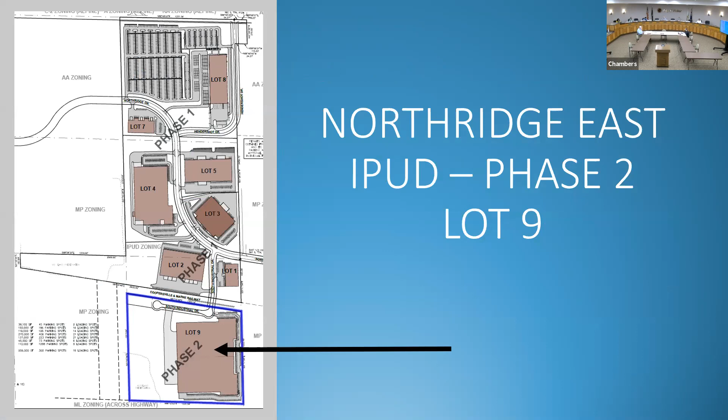So again, here's the amended version of Northridge East IPUD Phase 2. And we're calling this Lot 9.

So for the Speedrack site, the following improvements are proposed, and this is just for Phase 1 of this development. Phase 1 consists of a 278,000 square foot building for shipping, warehouse, and manufacturing. It also has some space for office and some training. There are 194 parking spaces proposed, and the plan also calls for 111 deferred parking spaces. And then there's an additional 349, I believe, parking spaces that are called out on the plan to be deferred, and we'll talk about that a little bit more in a few minutes.

They are also proposing lighting, landscaping, and stormwater management facilities. They're bringing utilities all the way to the western property line, water and sewer. And there's also space for future building expansion that would mirror Phase 1.

So Phase 2 would consist of essentially this, the other half of the building. So in the end, this will be a pretty large building. So here's the overall site layout.

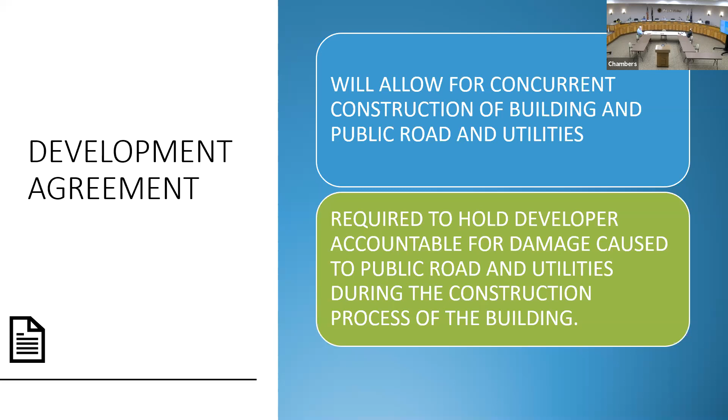So to speak to the railroad crossing, it's an easement agreement, separate from the development agreement, and it's being reviewed and handled by the manager's office, the developer, and the city attorney. There were a lot of emails going back and forth about items to include in the easement for the railroad crossing, including that sight distance be maintained so the railroad tracks on both sides are visible at all times.

In addition to the easement agreement, we've asked the developer to add a note to the plan indicating that no trees or other landscaping are allowed that could impair the lines of sight to the tracks. It says to mow the area regularly, and vegetation shall not be allowed to exceed 12 inches in height. It's always good when we have that right on the plan, so we don't have to go digging for a separate document if we ever have to enforce it.

So I am making a recommendation that the Planning Commission grant final area site plan approval for the 278,000 square foot industrial building and associated site improvements for phase 1 for Speedrack Midwest within phase 2, or lot 9, of the Northridge East IPUD, per the plan set with the last revision date of April 19, 2021, subject to the following conditions.

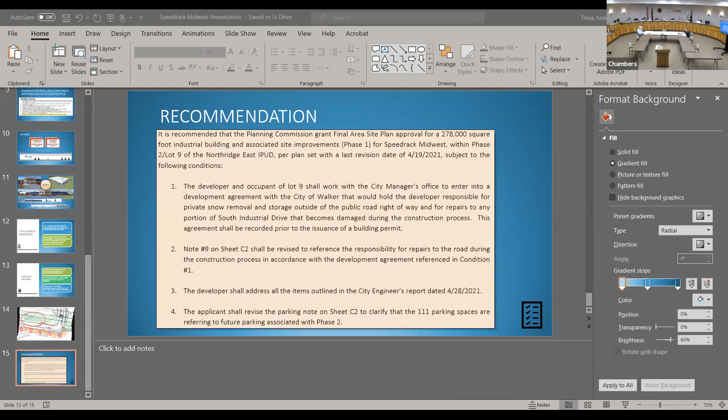How often does a train go down that track? That's a good question that I do not know the answer to, but I have been on the Coopersville Marne Railway on the Santa train. Is that at a holiday or something? Or the robbery and stuff on it? Would Commissioner Bile have an answer to that?

I didn't hear the question. Oh, is your mic on, Joe? How often does a train go down that track? 6 times a month, maybe? 6 to 8 times a month, not high traffic at all. That much? Okay.

I do have a question though. Item number 1 says the developer is responsible for private snow storage outside the right of way. Is that what you're intending to say? Keeping snow storage out of the right of way. Is it not reading right? I don't know, I was trying to figure out what it was saying. So, to hold the developer responsible for private snow removal and storage outside of the public road right of way.

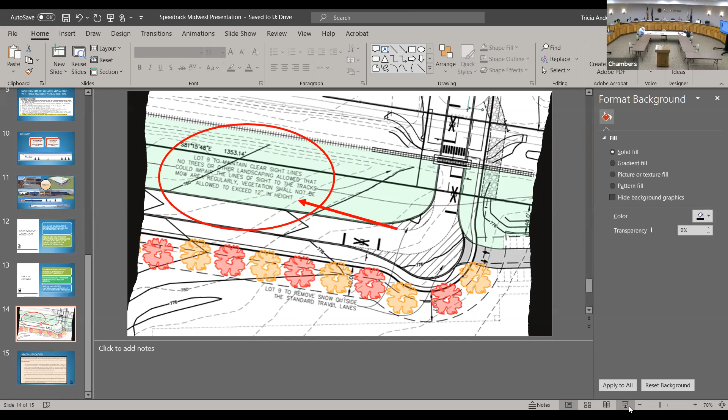So Scott's memo was dated April 28th, 2021. You'll notice it has 8 bullet points on it, which is typically more than we usually see at this point in the process. But Scott wanted to make sure I pointed out that the reason there are so many comments at this point in the process is because when this went through site plan review, the plans were missing a lot of information. Our main comment was to get a lot of stuff on these plans.

So what you're seeing before you now is almost more of what we would typically go through at a site plan review. None of them are showstoppers. They're important details though that we still want to have addressed. I can talk through each one of them, or I'll just try to go through them real quickly one by one.

So the main sheets we were referencing are C2 and C3. C2 is a site and utility plan. We had a comment to add driveway details such as driveway width, the radii for the driveway coming off the end of the cul-de-sac there, and towards the end of the road too.

The second bullet talks about truck sizes. You're going to see some dashed lines on South Industrial Drive that make that bend through what we kind of call the wounded knee, because it looks like a 90-degree curve there. We'd like to know what size truck turning templates were used to make those lines, because we want to compare that to what size trucks the company needs to use on a regular basis. It's in everyone's best interest to keep that turning radius as large as possible to allow trucks to pass by.

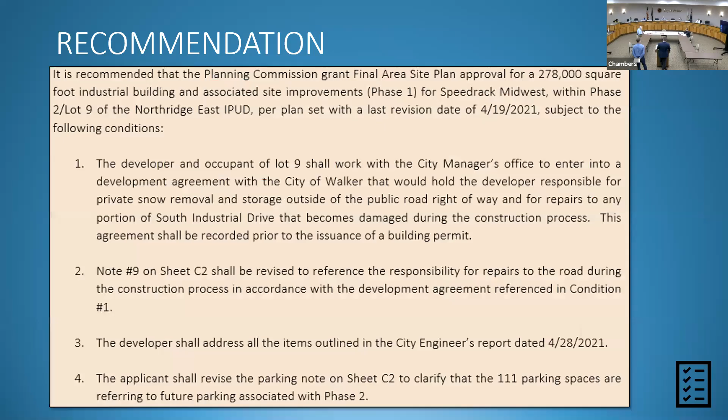Obviously right to work, so this won't automatically be a union facility, but we have a very good working relationship with the millwrights out of Warren, though they have a facility on 131 in Wayland. It's a brand new facility, a wonderful training facility. They're going to help us recruit employees for this facility and train them as welders and robot operators and so forth. That's another wonderful opportunity.

We plan to have them on board with full benefits, medical benefits, vacation, sick time.

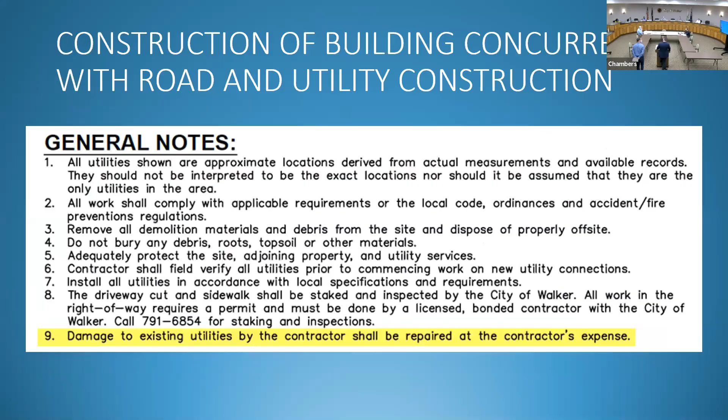Sounds like a nice addition to this area. Yeah, I think the average wage should be right around $25 an hour. I think this area for what we do is probably going to demand that, but I think we'll be competitive with that wage in this area.

One of the things raised in the review was the number of parking spaces. It sounds like even with the number you've deferred, you may have more than enough parking to meet your needs. Certainly. Originally we're planning upwards of 150 hires in phase 1, including the 20 salary folks, plus the 40 coming from Sparta. It'll be a 2-shift operation, and the next phase will probably be 75 to 100 more employees, so I think we'll have plenty of parking.

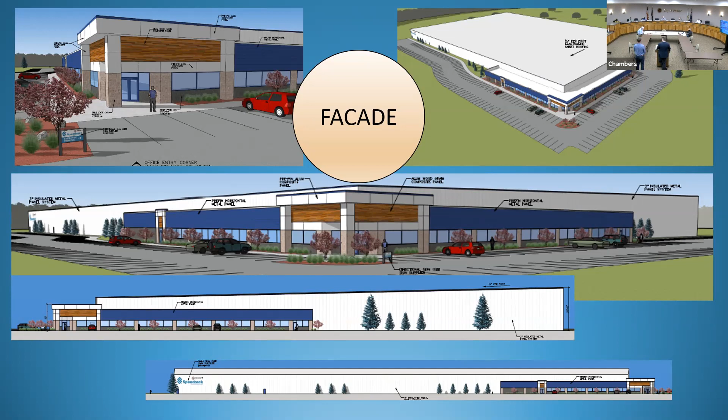It sounds like with 2 shifts, when there's that crossover, you've got the capacity. Yeah, and that road coming around, there was some question on that 10-foot area. If you look at that, our salary employees are over on the east end of the offices. We originally had employees coming in that same entrance and parking over there, but it's really a safety concern, because typical hourly employees want to get out of work and get going. So we decided to divert that traffic that way for the hourly folks so they don't have any problems getting out.

All right, very good. Commissioners, any other questions?

So I sense from your standpoint, times are good and they're going to get better. You're building stuff for new plants, new machinery, new shelving, and you're expanding, so you're doing well during good times, is that right? Yeah. In our industry, because of Amazon and what they've shown us, they've given us a picture for the future for the next several years. For us to meet that demand, this building is necessary for us to continue to grow. But just e-commerce in general, Gap, we do all of Gap's buildings across the country, and they're becoming almost 100% online. The clothing retailer e-commerce, and Macy's is going that direction as well. With everything with COVID, I think people are used to ordering online and they're going to continue to, and that's our specialty, building these types of racking systems.

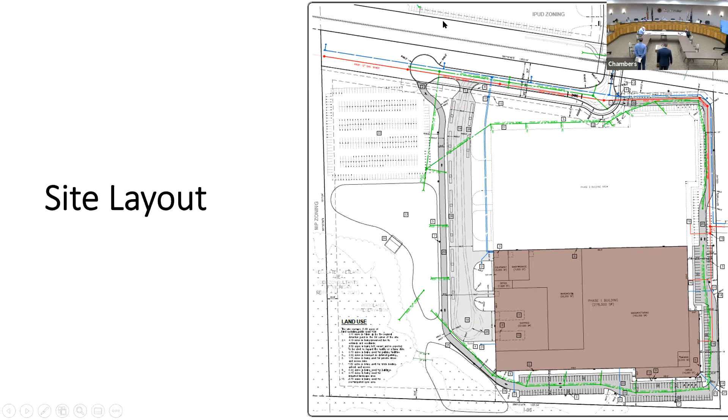Got a fairly complete discussion of the application, with good comments from planning and engineering. Any questions, or is someone ready to offer a motion?

I can offer a motion, Mr. Chair, for case 21-001 to approve the final area site plan for a 278,000 square foot industrial building and associated site improvements, phase 1, for Speedrack Midwest -- it would be Speedrack, not Speedrack Midwest, Speedrack Products Group -- within phase 2, lot 9 of the Northridge East IPUD, per plan set with a last revision date of 4/19/2021, subject to the following conditions.

The developer and occupant of lot 9 shall work with the city manager's office to enter into a development agreement with the city of Walker that would hold the developer responsible for private snow removal and storage outside of the public road right of way, and for repairs to any portion of South Industrial Drive that becomes damaged during the construction process. This agreement shall be recorded prior to the issuance of a building permit. I think we did clarify the intent on that condition as well, so that should be considered as they're doing so.

Number 2, note number 9 on sheet C2 shall be revised to reference the responsibility for repairs to the road during the construction process in accordance with the development agreement referenced in condition number 1. The developer shall address all the items outlined in the city engineer's report dated 4/28/2021. The applicant shall revise the parking note on sheet C2 to clarify that the 111 parking spaces refer to future parking associated with phase 2.

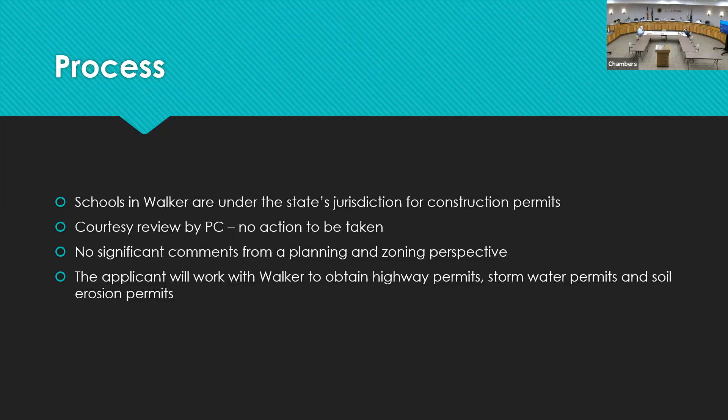Kenowa Hills Early Childhood Center is being proposed for a building addition, playground expansion, and new access on Kinney. The schools in the city of Walker are under the state's jurisdiction for construction permits, so they'll work with the state of Michigan to get their building permits. We usually do a courtesy site plan review here at the Planning Commission because they find your comments beneficial on the site plan, and they'll be working with the city of Walker to obtain highway, stormwater, and soil erosion permits. So a lot of this review is geared toward those items. From a planning and zoning perspective, I don't have a lot of additional comments or recommendations, and again, there's no action to be taken tonight, just a courtesy site plan review.

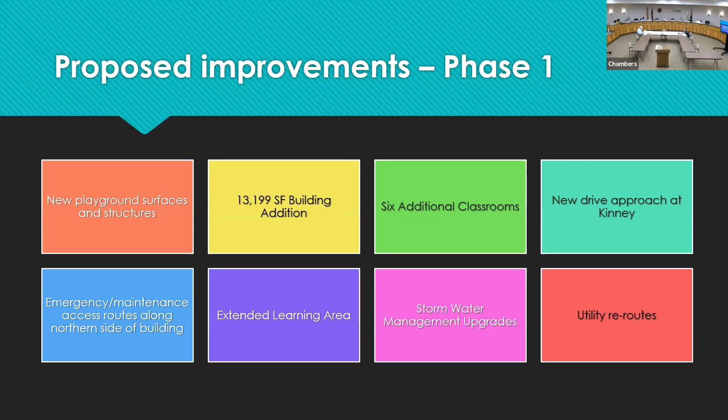To give an overview of the proposed improvements: new playground surfaces and structures and new playground areas where there weren't before, a 13,199 square foot building addition with 6 additional classrooms, a new drive approach on Kinney where there was not one before, and emergency maintenance access routes along the northern side of the building. They're also proposing an extended learning area, stormwater management upgrades, and moving some existing utilities around on the site.

So this is what the existing conditions look like. Let me move this thing over. Is that going to bother you, Jason? Okay.

I did an overlay of the aerial photo on top of the site plan, so you can see the large building expansion here and all the new playground areas here. They have an existing playground here, which I believe is planned to be replaced, and other areas out here being added for playground, part of the extended learning areas. And then they've got a driveway access here on Kinney, one way in, and coming out you can go left or right.

It's their intention to have parents take this access drive from Kinney and do drop off and pick up over in this area here. This is also meant for teachers and staff to come in and park. The Richmond Court access will then be used for buses. There are 2 buses, since this is an early childhood center and not a regular elementary school, and the kids being bused over will be attending before and after care, then bused back to their regular school.

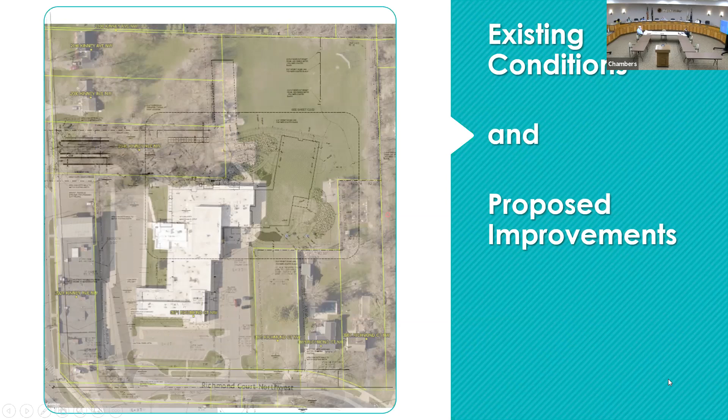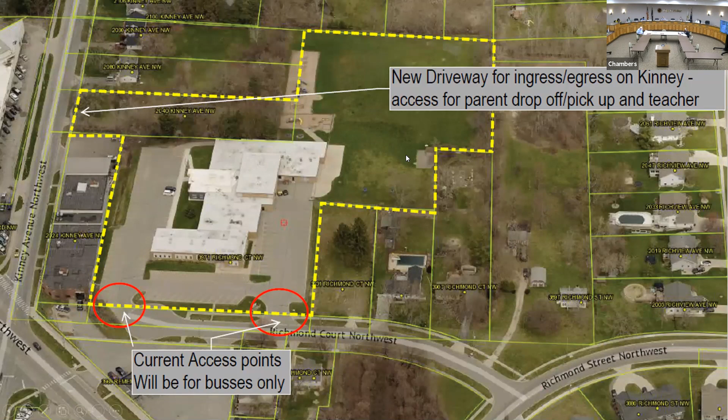Here's another view of the site. Again, these access points here on Richmond Court will be for buses to move in, through, and out, and this is the new driveway location for the drive approach on Kinney. And this is the site layout without being overlaid, so you can see the extensive amount of playground expansion that they're proposing here.

I secretly wish that my children were attending this early childhood center. I guess it's not a secret anymore.

It sounds like they have a bond out there, and this is the first part of what's covered under that bond. Phase 2 they'll be getting ready for in 2025. According to the applicant, the next phase will be designed to align with the next funding phase for the bond, and it'll include another building addition along the south side of the building. At that time, Kenowa Hills Public Schools will come before the Planning Commission for another courtesy site plan review, just as they are now.

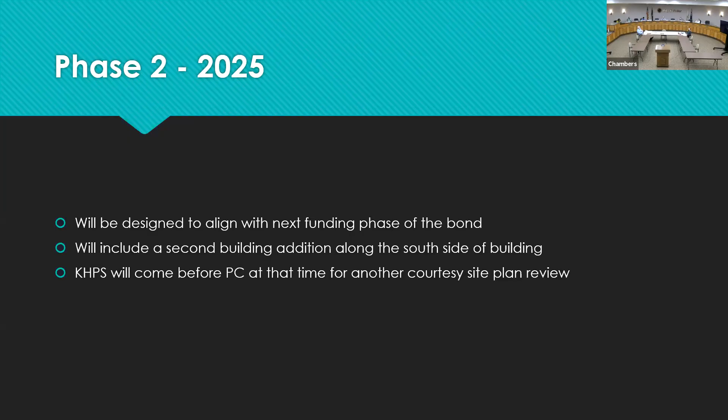And with all those comments said, I'm going to hand it over to Travis for any engineering comments.

Leave it up to the engineers to always have comments, right?

So, like we said, this is just a courtesy review, and our comments are pretty small on this. We got 4 minor comments listed in Scott's memo from April 28th, 2021. The first was adding an address to the plans. I know it's on the cover sheet, but the request is more to just sneak in an address label on the other sheets, which is helpful in the future as we refer back to plan sets.

Bullet point number 2 talks about the curb returns for the new driveway. I don't know if you can quite see it on this screen, but where the parent drop-off driveway is, the curb radii seem to stop a little short of the existing curb line, and then it kind of flares out.

I figured it was just some sort of a drafting snafu, so I just want to get those lined up so that the curb radii tie straight into the road radii.

Bullet point number 3 was the ADA warning plates. I know this gets a little difficult, and this is kind of at that borderline spot, but they're technically not required for this driveway. We only require ADA warning plates at public road intersections, or something that operates like a public road intersection, such as a major driveway at a traffic signal or something.

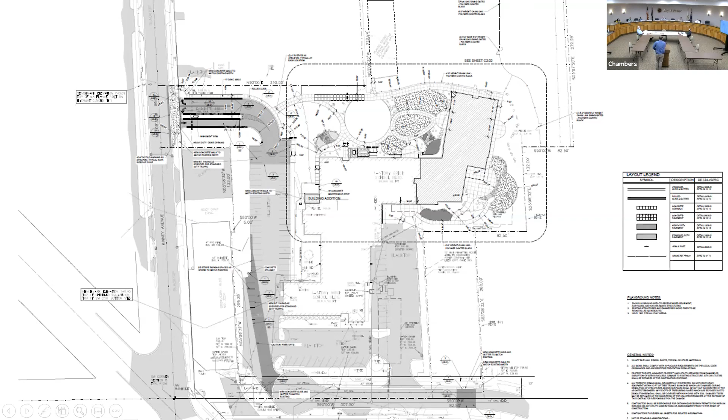Okay, I was just curious, did you own the lot or did you have to buy the lot out to Richmond or Kinney? That lot was purchased by the school. Oh, I just didn't know if there had to be rezoning or anything. That's just my ignorance, so sorry.

Oh, and I can look that up for you—I'm almost positive it's R1, but I'll find out for sure. Okay, so I knew it was some kind of residential zoning district. Thank you, Mark.

Any other comments or questions of our staff? Okay, we'll turn it over to the applicant, please.

Good evening, my name is Travis Brujink. I work with GMB Architects Engineers here tonight, representing Kenowa Hills Public Schools. Also with me is Superintendent Jerry Hopkins. We're here to answer any questions you have.

I think Trisha did a really good job laying out what the project is, not a whole lot to add. From a utility standpoint, we are bringing this site up closer to compliance with the more recent stormwater rules, trying to make sure we're doing better than just the bare minimum. We've also got, as Trisha mentioned, some really nice outdoor features—extended learning areas outside—to help the kids at the site. Other than that, Kinney and the drive approach are the two big significant changes to the site besides the addition and the pond. So I think that's it.

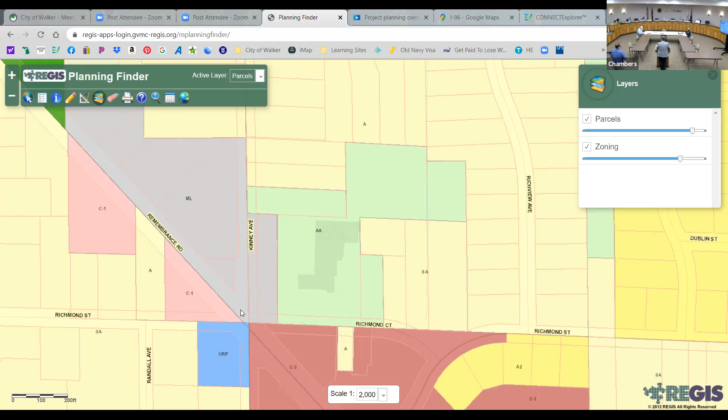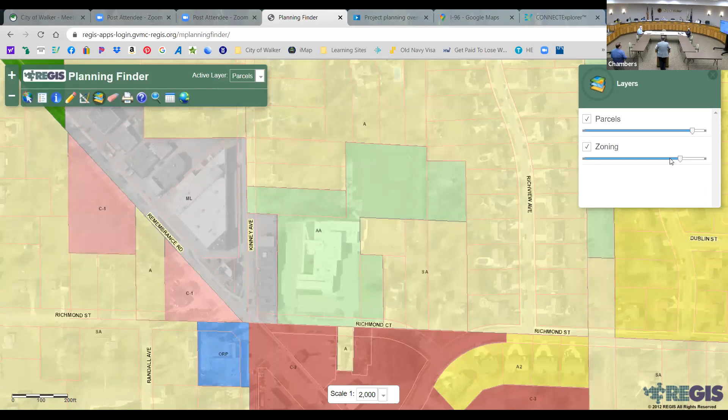So the district did purchase the 2 lots, where the driveway is planned. Not mentioned, but I think it's important to the commission, and important to us, is there will not be access from Kinney as a cut through into Richmond Court. Through the development process, there will be a complete distinction there. That was always a concern of ours, and why we took so long to plan it - we were concerned it would become a cut through into that neighborhood, and we don't want that to be the case. So that will be taken care of as well.

So any questions that you might have?

We appreciate you guys in education. I don't know of any more trying year you must have had. What's going on now, to get up in the morning and not know what's going to happen, and everybody's got their own idea of what's wrong and what we should do. This must be just terrible. We appreciate all the efforts you're making, and you've got a good school system. I'm a pediatrician at ABC Pediatrics, and about 25% of our patients went to your schools. We've had an excellent relationship with you guys, and we appreciate you. Thank you, it's been a trying year to say the least, but it's almost finished.

If I may, what's the capacity of the building now, and how do you see the increase in capacity associated with this addition? That's a great question, and a difficult one to answer because of the programming that we have.

We serve about 125 students in our before and after school program, for school age children, and some younger ones who come early because of parents working. During the day, we have around 300 students that access the building, not all at once, but through different programming. We offer childcare, early childhood special education, Great Start Readiness preschool, and tuition-based preschool. So it's a busy place, very busy place.

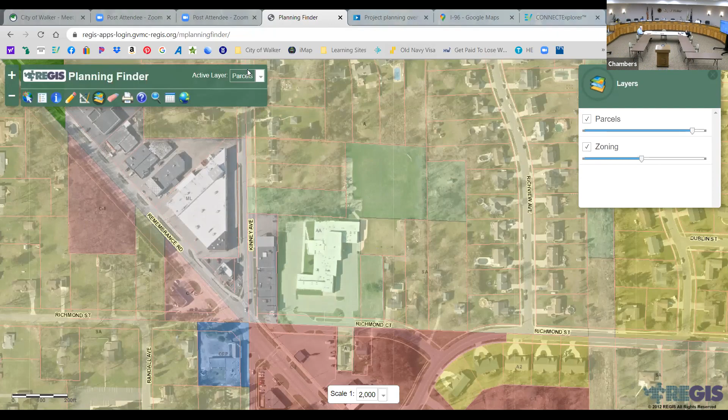Okay, the last item on the agenda is case number 21-015, a highway sign review for the property at 3261 3 Mile Road, Culligan Water. Dan Fenske of City Sign Erectors - if he's not in the audience, is he online? Okay, all right, Tricia, if you want to go over the request, please.

You probably remember the planning commission approval of the redevelopment of this site back in July of 2020, over on 3 Mile Road, 3261 3 Mile Road. Right now they're wrapping up their construction efforts there, and they're getting ready - to the point now where they're ready to install some signage. They've applied for some wall signage on the front of the building and some wall signage on the side of the building that faces I-96.

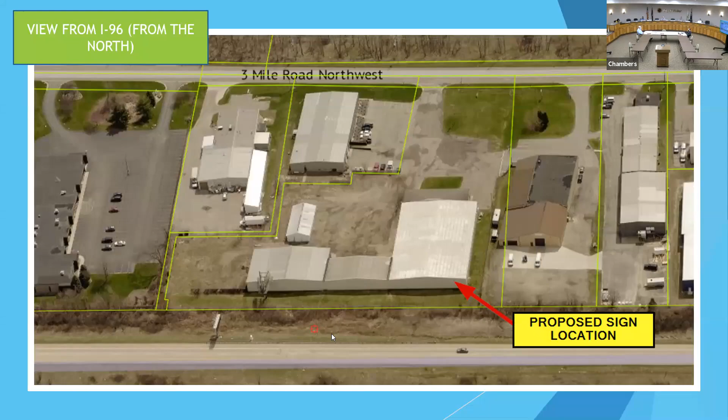Case number 21-015 highway sign review, 3261 3 Mile Road Northwest, Kaat's Culligan Water, Dan Fenske of Sign City Erectors. I make a motion to approve the 60 square foot wall sign facing I-96 for Kaat's Culligan Water located at 3261 3 Mile Road Northwest as proposed. Support. Motion by Tyler, supported by Steve, to approve the requested 60 square foot wall sign.

Tricia, if you could go through a roll call, please. Steve, yes. Terry, yes. Tyler, yes. Joe, yes. Scott, yes. Mark, Tom, yes. Pat, yes. Motion carries. Alrighty, thank you.

Tricia, anything? So since we last met, the Waterford Village project went to the city commission, and you probably are all aware that the city commission voted 4-2 to deny that rezoning request. On the May 10th meeting, they'll be adopting findings of fact in support of their decision. I think what that means is that the developer will likely go back to the drawing board and move some pieces of the plan around in order to meet the direction of the city commission.